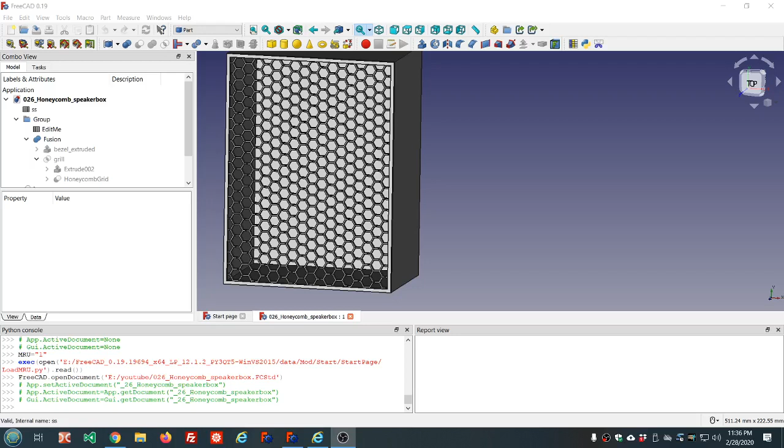In the last video, we made this honeycomb speaker box, but it really wasn't complete because there was no way to latch down this grill. So today we're going to look at some possibilities for making some latches for that.

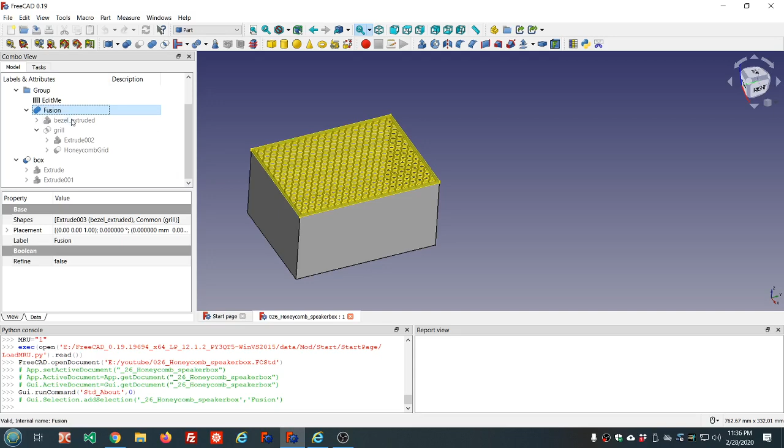So let me just move this a little bit so we can see a little bit more what's going on here. You see, it just sits flat against there.

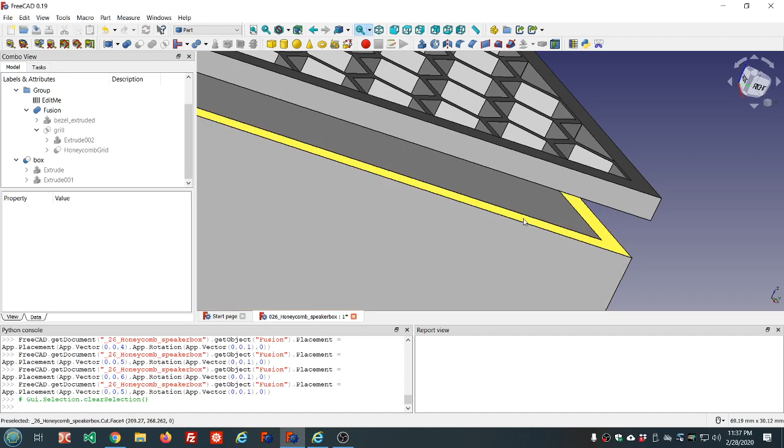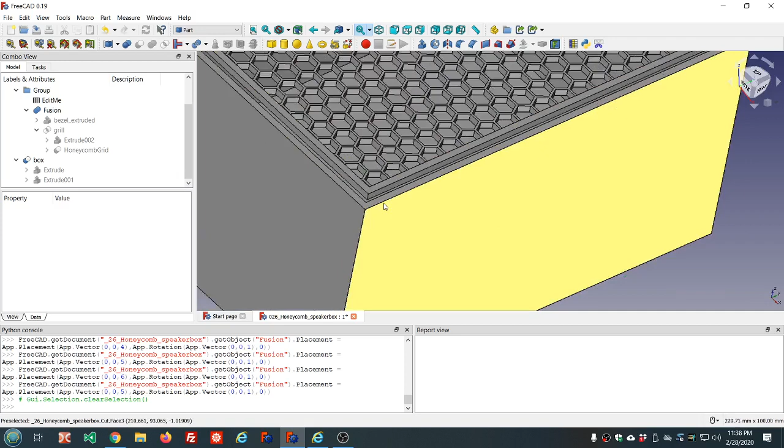Now you could just glue it in, but then how do you get it back off? You could maybe find double stick tape that would probably hold it well enough, and then if you needed to get it apart, you might still take it apart. Maybe a Velcro type thing. So those are some options. We might, depending on the wall thickness you're using, make some little holes, put some little screws. So there's some different options as the model is that could be used.

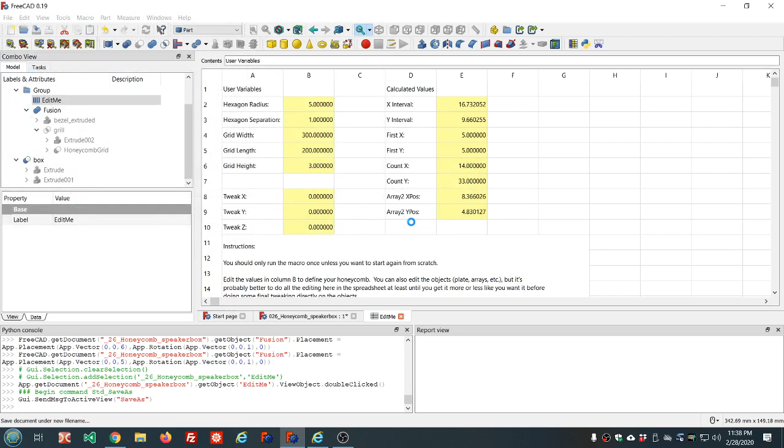But I'm going to try to, the first thing I'm going to do, let's save this as 027, which I already did as I was playing around with this earlier. Okay, so now we have a new file name to work on.

The first thing I'm going to do is change this radius to something much larger. That's going to speed up the process of working on it. It's going to throw things off a little bit, but that's okay. See, the grid is not in the right spot right now, but that's okay. We're not going to worry about that.

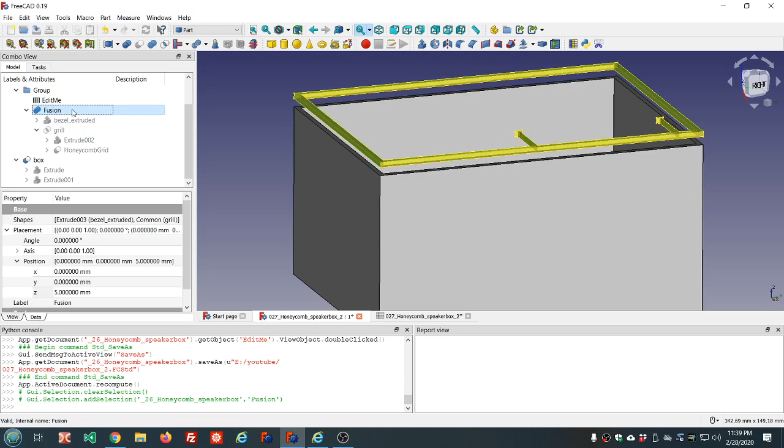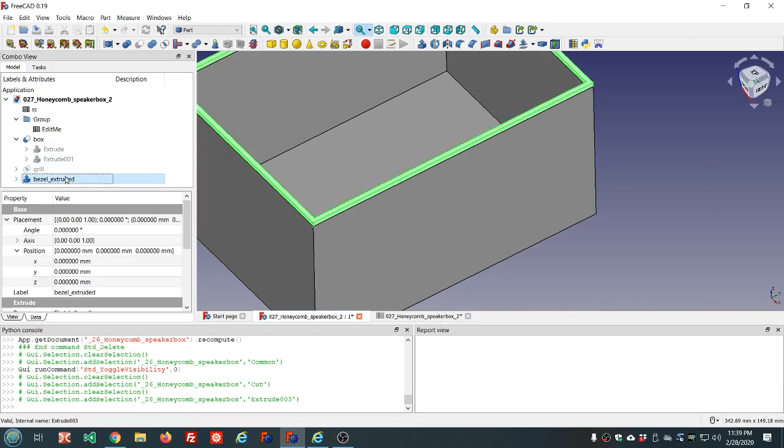I'm going to delete this fusion object, and hide that grill. We don't need to see that. So now we have the box and the bezel. I'm going to hide the box. Let's make the sketch visible. It's the bezel sketch that was used to create the bezel.

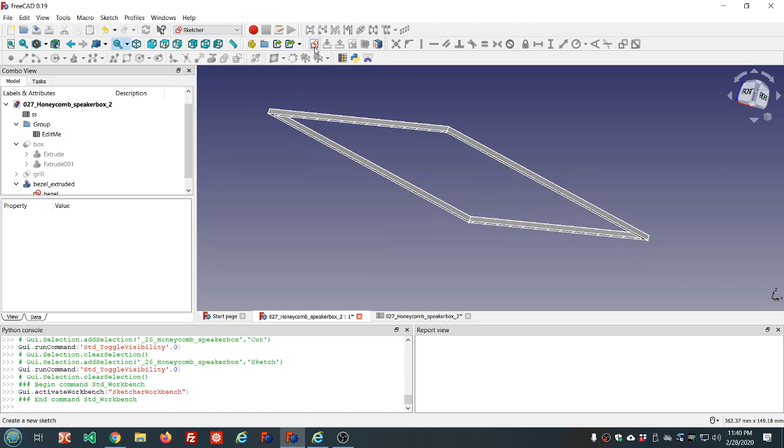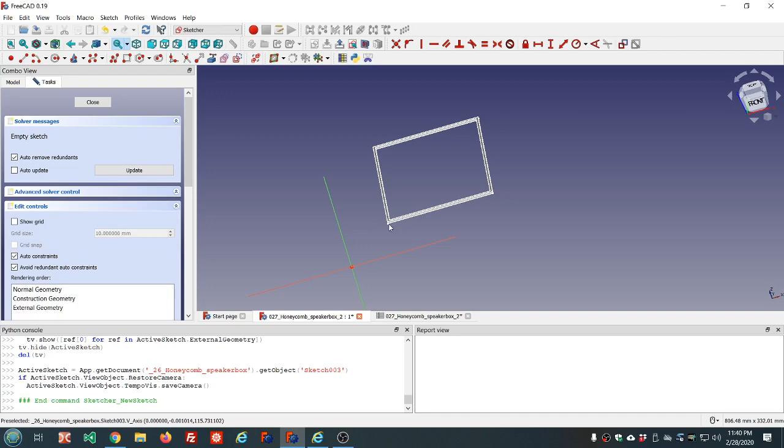Alright, now let's go to Sketcher. Create a sketch on the XZ plane. Now we see that because we didn't center the bezel sketch, we just put it where the honeycomb grid showed up. So we need to move our sketch to that position.

So what I'm going to do is close it for the moment, reopen the bezel sketch. Remember these, we just locked it in place where it was. I'm going to change this to a nice even number like 85. I'm going to give this a name. This is going to be a Y offset.

When you name a constraint, you can refer to it from other objects using the expression engine. So this will be X offset. That little bit of movement shouldn't matter because we had plenty of overlap with the original honeycomb grid object.

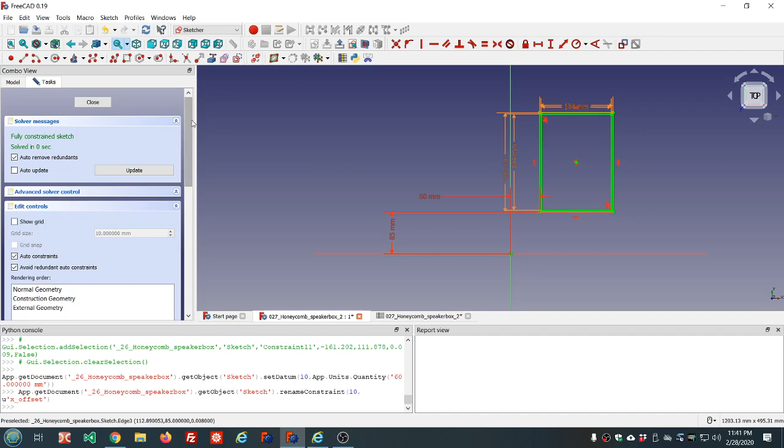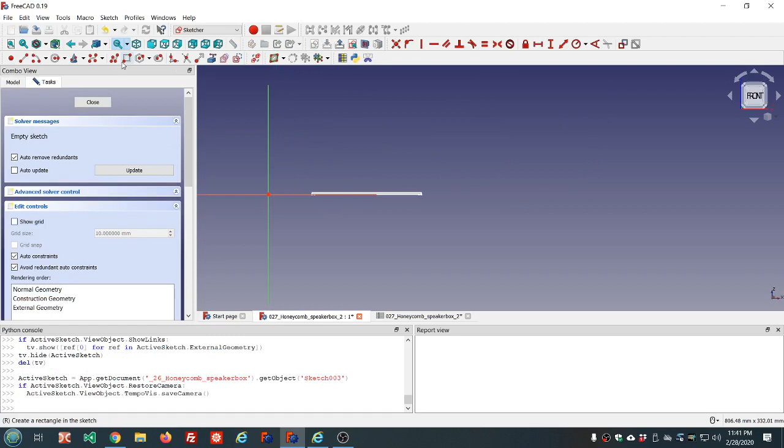Now we'll close that, and now we can move this sketch to position it where we need it. And that's going to be, let me just put something on in the sketch—just a little rectangle temporarily. So now we can see the sketch.

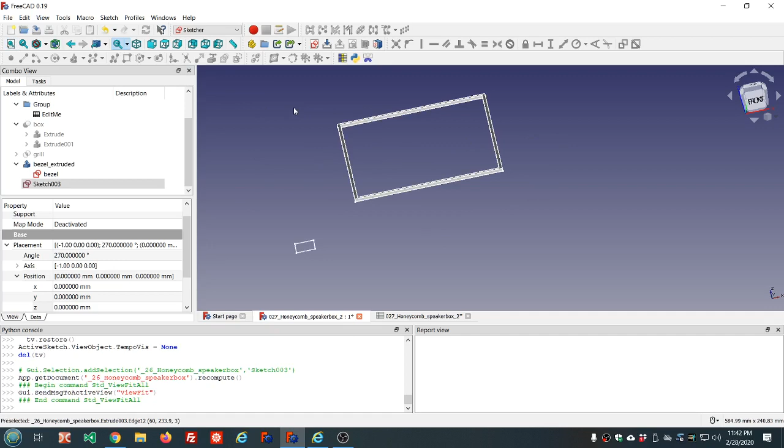Alright, so we want to move this sketch up in the Y direction by the amount of that Y offset, and that's in the bezel sketch. Constraints dot Y offset. And in the X direction, that's the equals key, bezel dot constraints dot X offset.

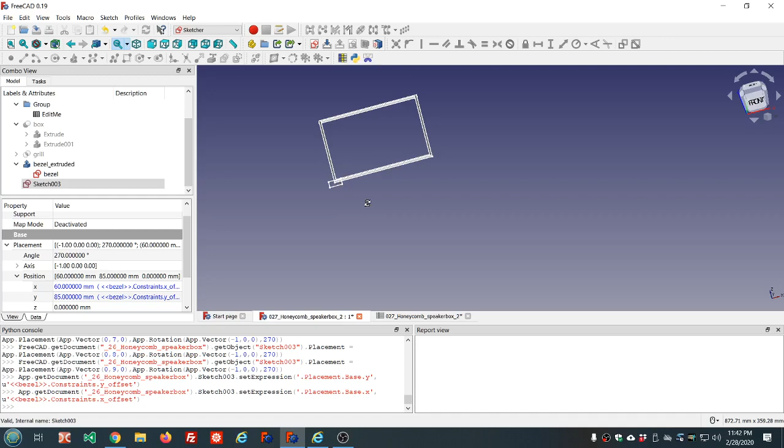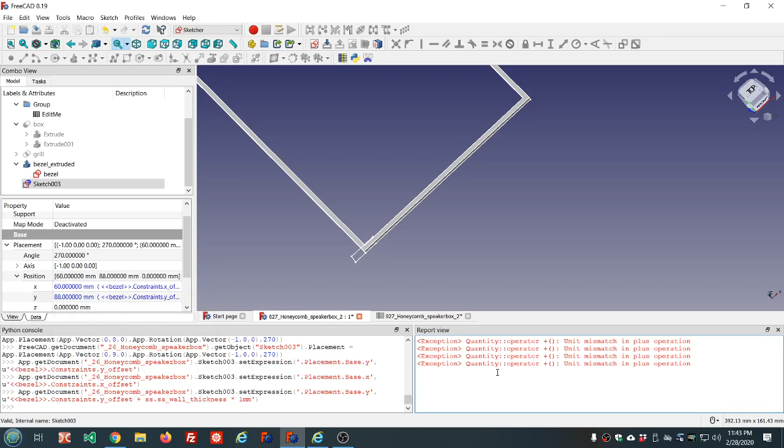Alright, and actually I want to move it up in the Y direction to right here. So that's going to be by the wall thickness. So let's modify this one. Say plus wall thickness times 1 mm. This error is a unit mismatch error. We need to add 1 millimeter to the formula to make that acceptable. And I'll clear this error. So now we see our sketch is positioned where I want it at.

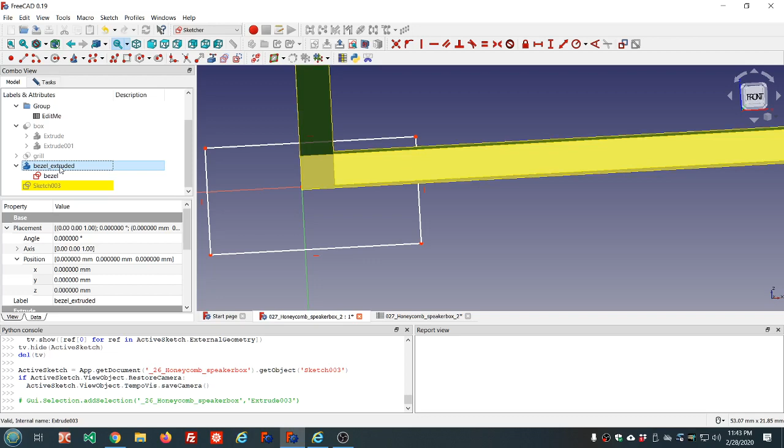Go back into it. Now I want to hide this extruded object. Now I know this is the wall thickness distance.

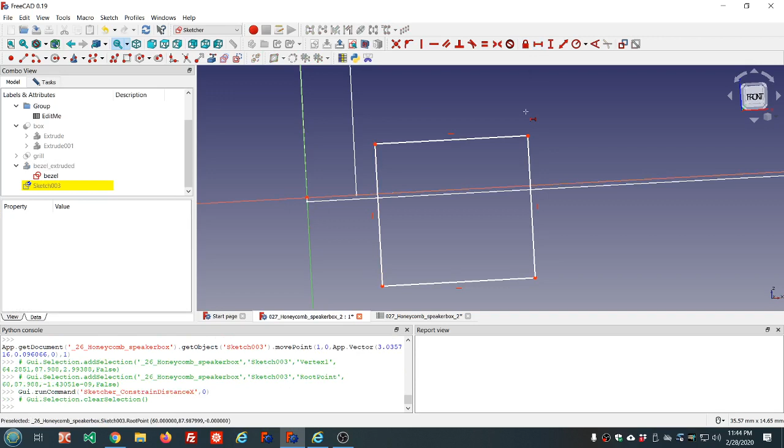So I'm going to set this with a horizontal constraint, from here to here, to wall thickness. Could also create a link to external geometry to that sketch, and that would do the same thing.

Maybe I should do that, but I've done it now, so it doesn't really matter. Now what I want to do is come across this direction by the same amount, wall thickness.

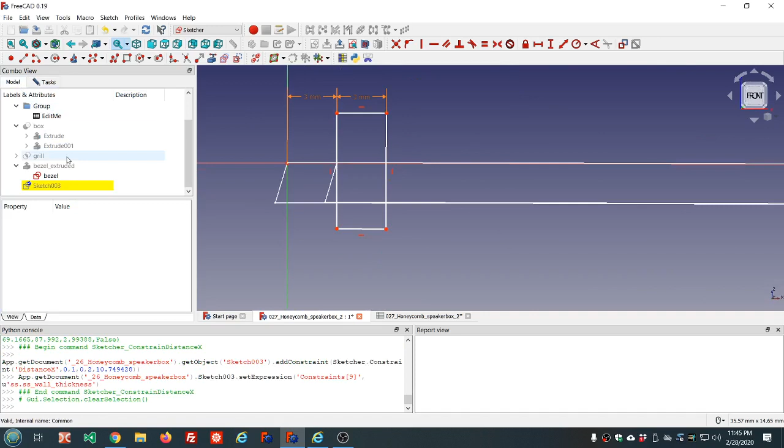Now let me show the bezel again. So see, I'm going to sweep something along this edge, and we're going to extend this bezel inwards by wall thickness, so it'll be twice as thick, the bezel part, in this direction. So that's what's going on here.

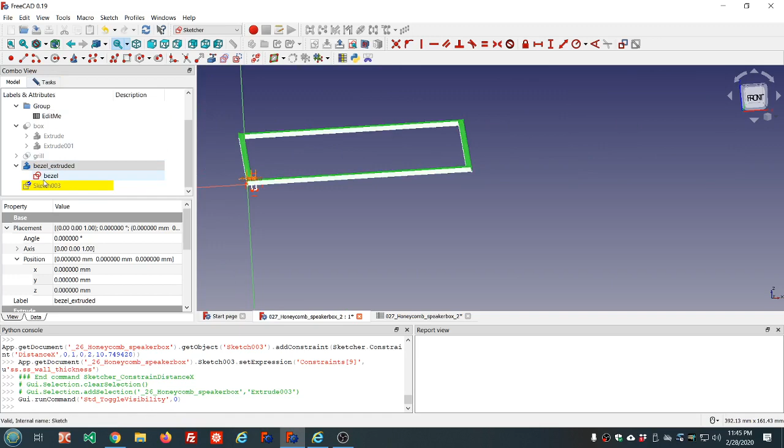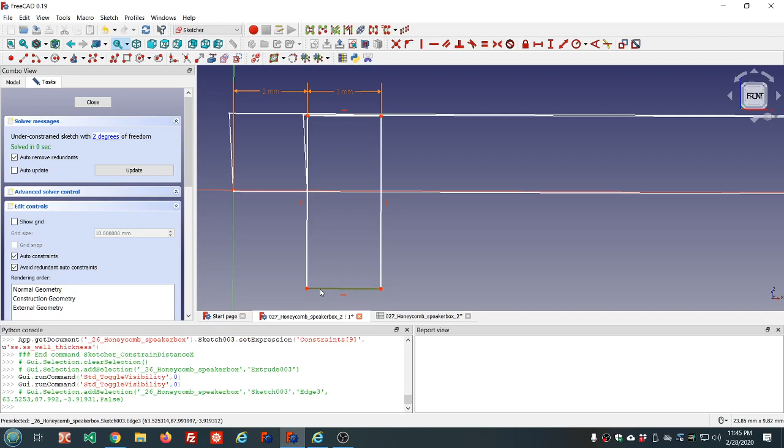But in addition to that, I want to come down below here too. Delete this edge. I'm going to make this wall thickness as well. Equals key here.

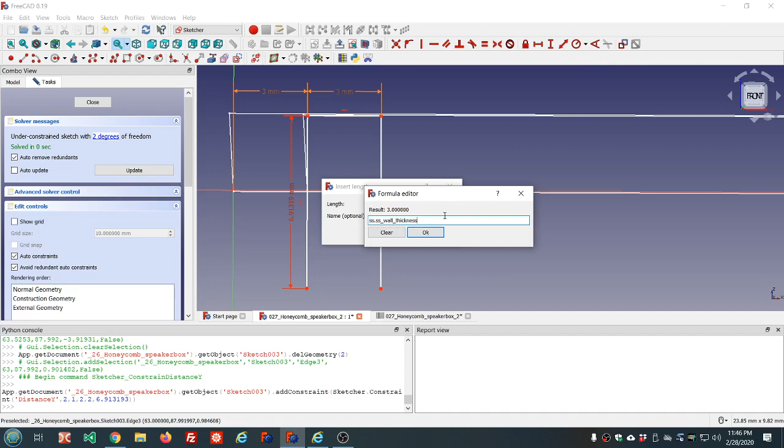And that needs to be wall thickness.

Alright, for this one, yeah, that's good. Now I'm going to add another edge of the line segment horizontal here, and this one will be half of that, wall thickness divided by 2.

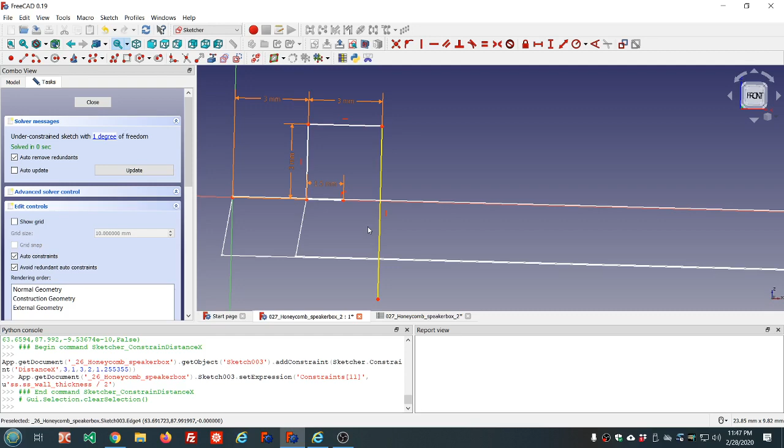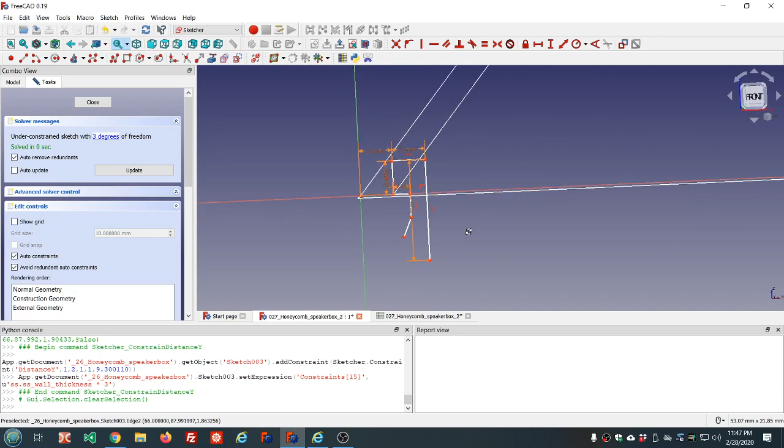Now we come down and add an angle there. So this line, let's make this one wall thickness times 3. And I want this angle here.

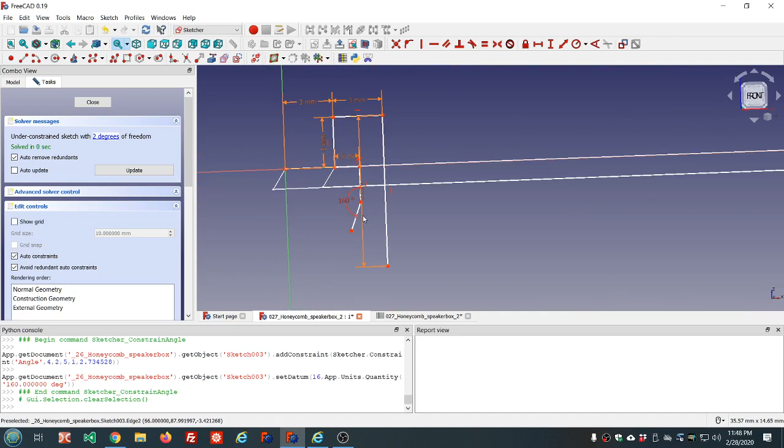160, what does that look like? That way if you print this on a printer, you won't need support because it'll be a shallow enough angle, hopefully.

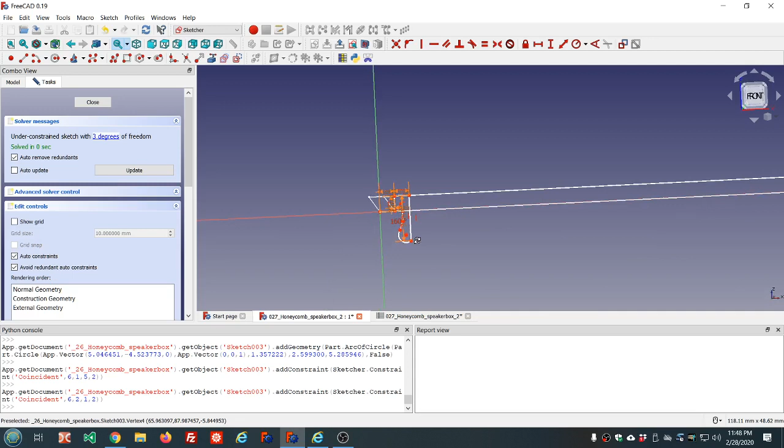And then I'm going to add an arc. We'll catch that point, we'll catch this point. So what I want this to do is come out far enough to push up against this wall, the wall of the box.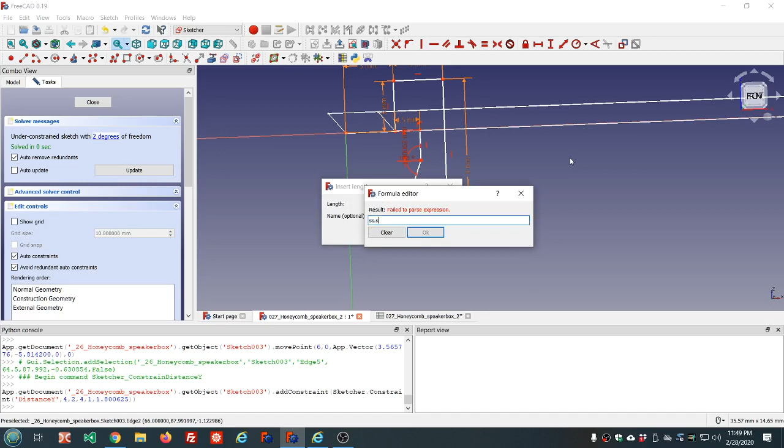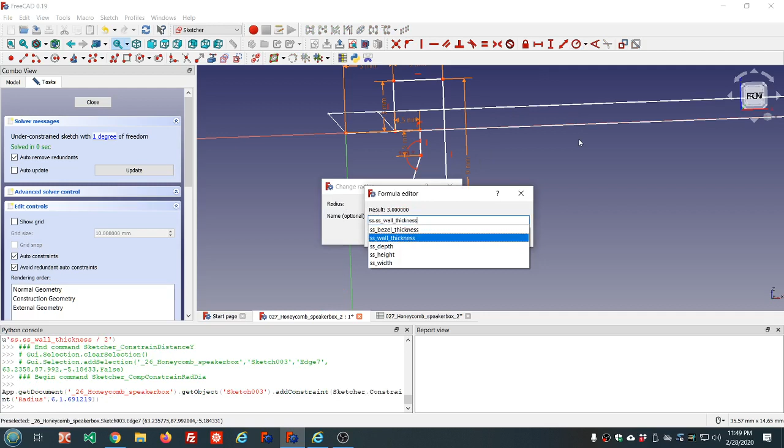And I'll constrain that length. Wall thickness divided by 2, see what that looks like. And this radius, wall thickness divided by 2.

And we have 1 degree of freedom, which is the location of that center. So I'm going to put it constrained symmetrically between those.

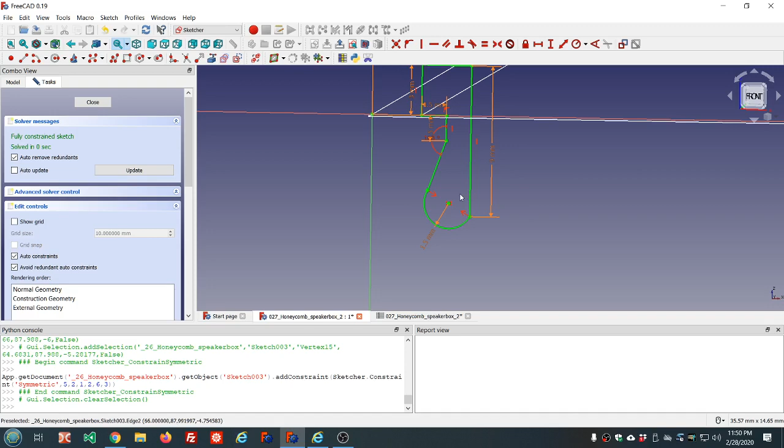Now let's take a look at the box and see exactly how this lines up. We'll go to wireframe mode, view front on.

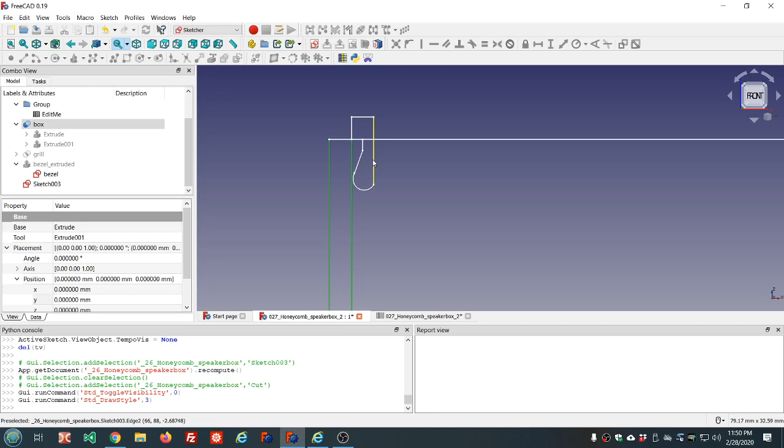Nope, it's not reaching the wall far enough. So I need to make some modifications. I want it actually digging into that wall a little bit, so we'll have a spring action here, pushing against the wall. That's going to hold this lid in with friction. So we need to go back into the sketch.

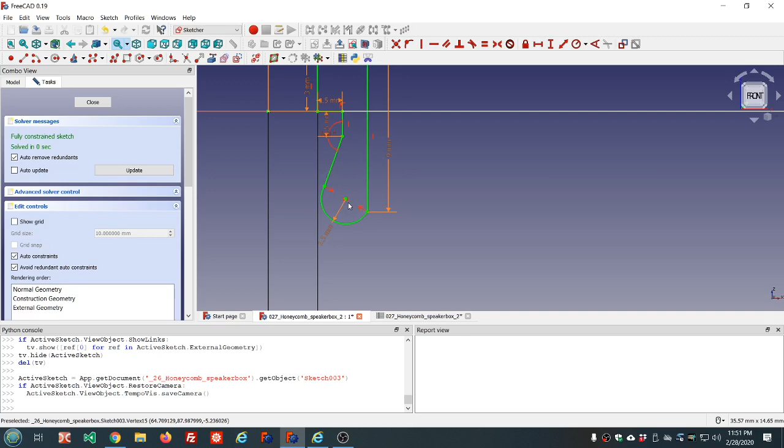Yeah, now we can see what we're doing. Let's get rid of that constraint, and this constraint.

So this one comes even with this. It will intrude a little bit. I think that can work for us. It's not much, but you don't need much. You're going to have to be kind of forcing this in. And we're going to actually cut a little groove in the box too.

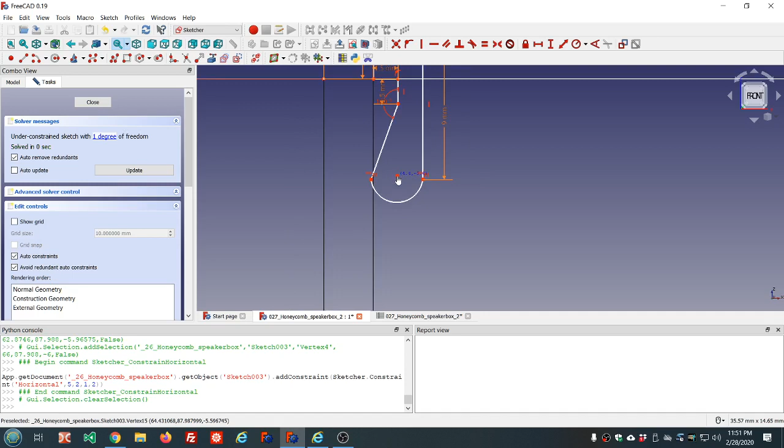So that looks pretty good. I might just constrain these back here, make them all horizontal with each other. Okay.

Now let's go to part. Let's hide the box again. And we'll do our sweep. Let's save this document in case this goes terribly wrong. Let's use the sweep tool.

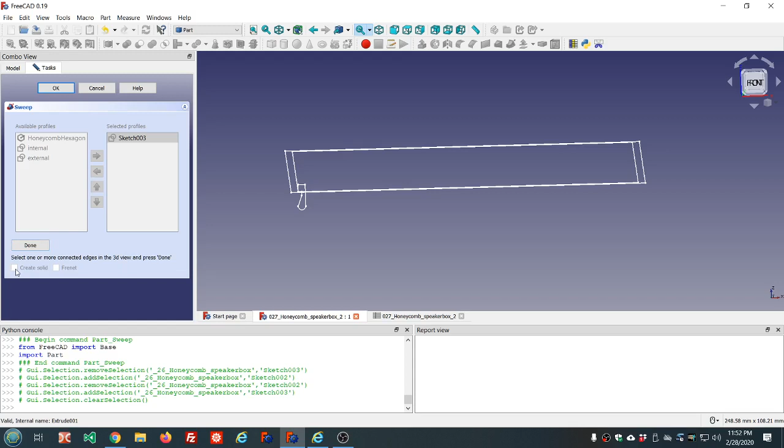It's going to be sketch 3. Sweep path. I'm going to select these inner edges. And we want this to be a solid, and Frenet.

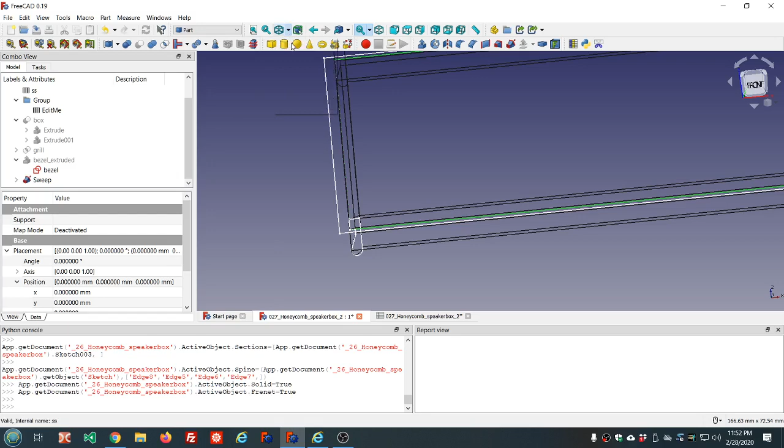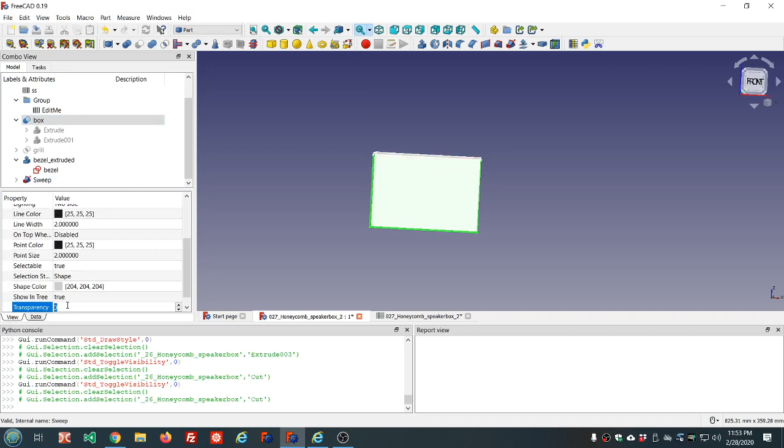If we make the box visible, if we can set the box transparency to something like 25. A little more transparency, 75.

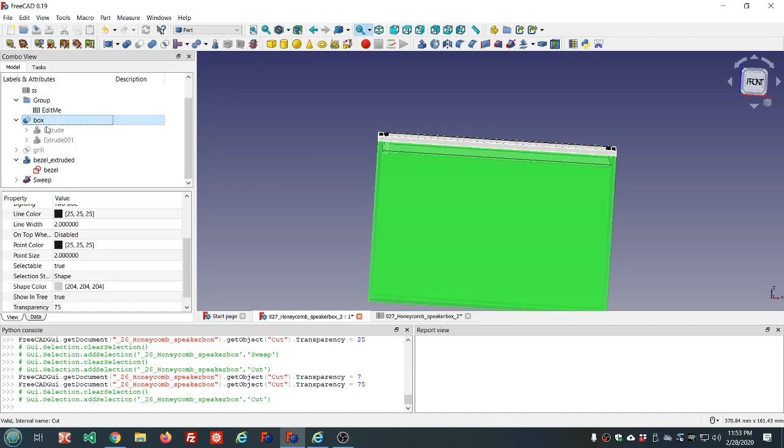Alright, now I'm going to cut the sweep out of the box. And the sweep, the grill, and the bezel will be fused together. That's going to be the lid.

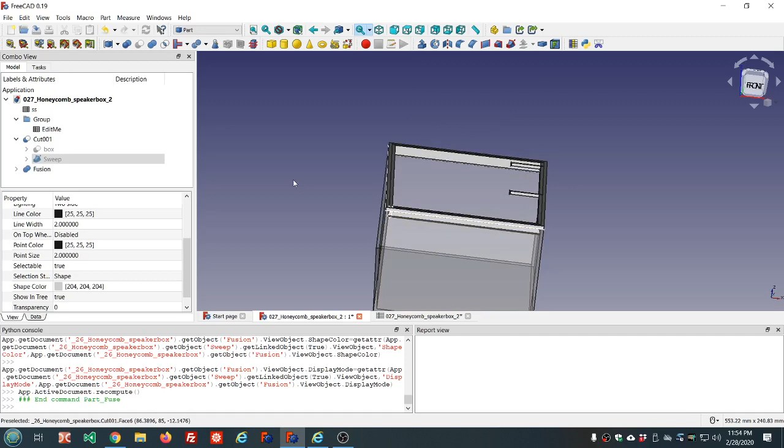Alright, now let's hide that, and hide these two sketches. So this is the inside of the box. Can you see the little groove?

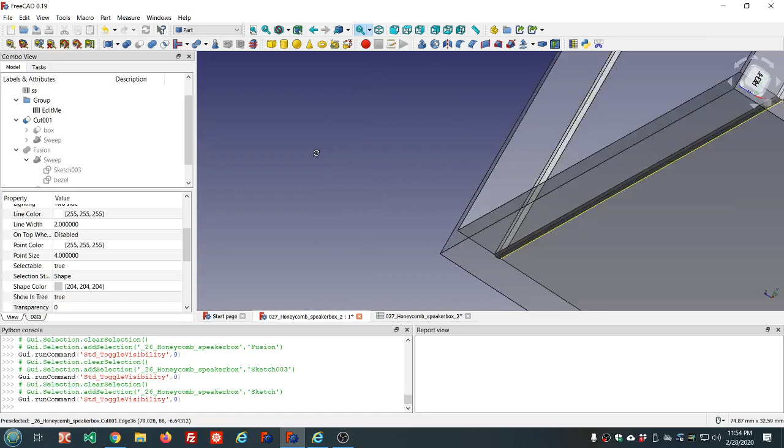I don't know how well that's going to work, but I think it could work. Maybe with a little bit more tweaking, a little trial and error. But I think this could work.

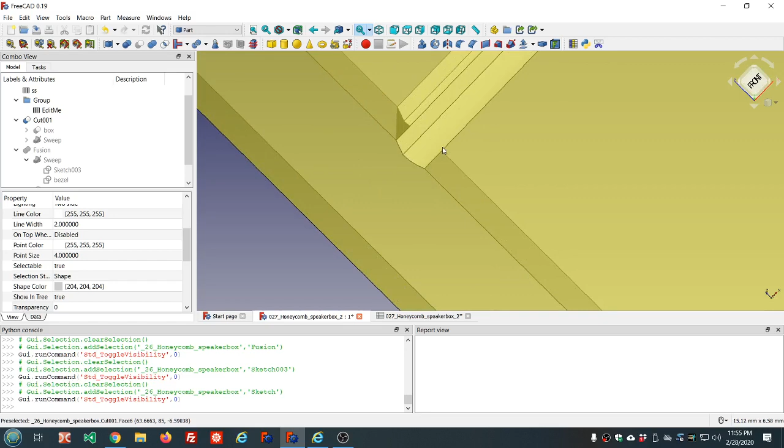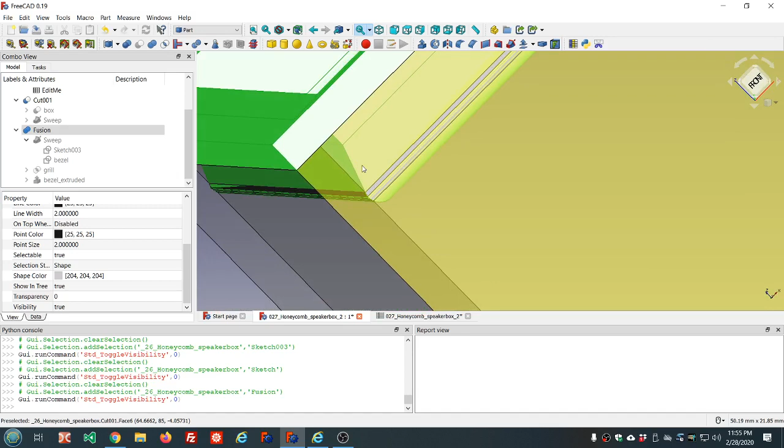Maybe just this angle, bring this up not quite as far. Let me check the geometry on this. Yeah, it's good. Of course the box will be good, that's simple enough.

Okay, now we need to go back in. And this is probably going to take a while to recalculate. We'll set it back to 5.

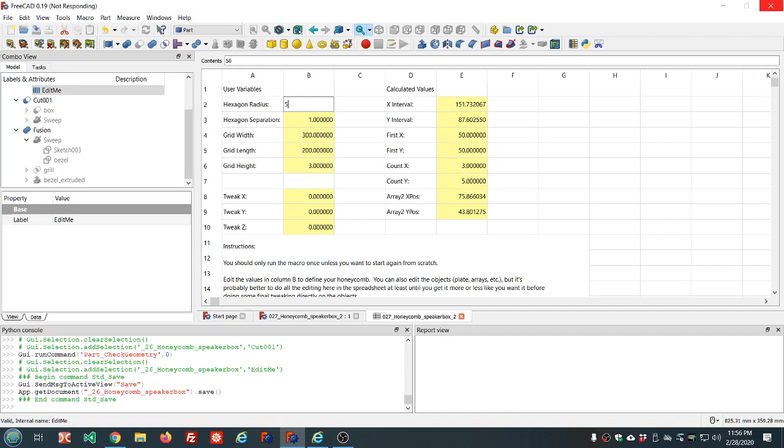I'll pause the video and come back after it finishes. And we're back. Well, that took a while. That took about 13 minutes or so.

Maybe your PC will be faster than mine. It's a little bit older. It's one of the original Core i7 processors.

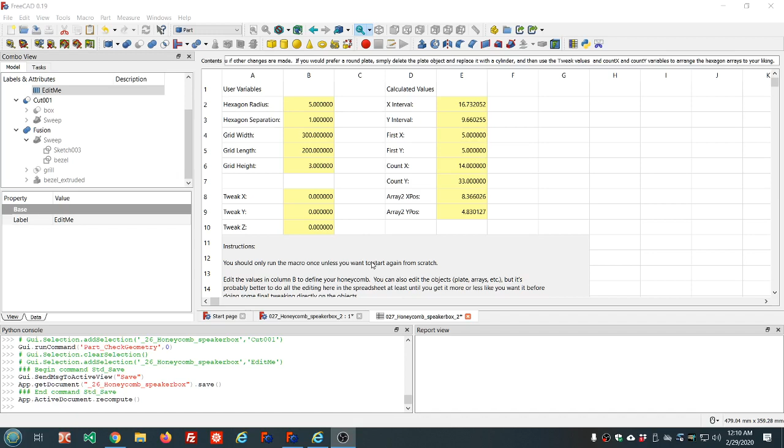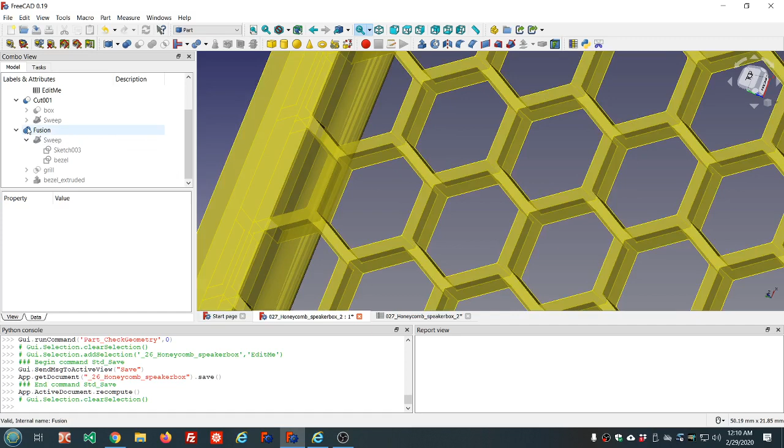Now notice this little extra bit here is what part of what was swept, and because I have the refine set to false, that shows up. But I'm going to put it on true, and hopefully it won't take too long to do this. And that's just going to remove these extraneous extra edges in here.

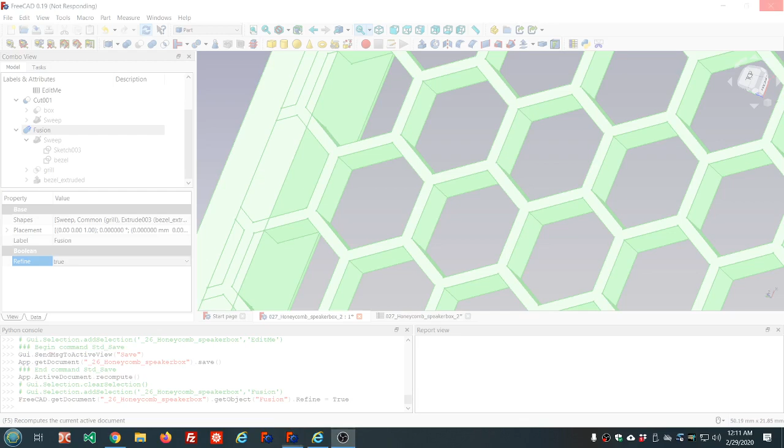I'll pause it again while this is working. And we're back, and that took about 8 minutes or so. So you have to be patient with FreeCAD.

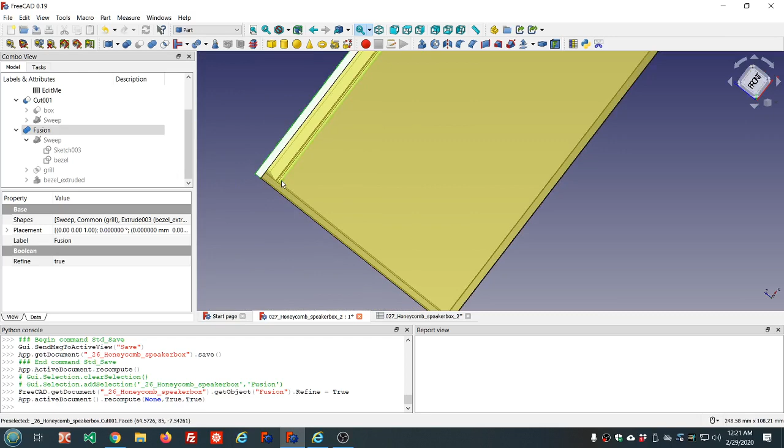Sometimes it takes a while to do things, and it looks like it locked up, but in reality, if you're just patient, it'll come through. And this has a lot of stuff it has to do in this particular case. You see there's a lot of stuff going on.

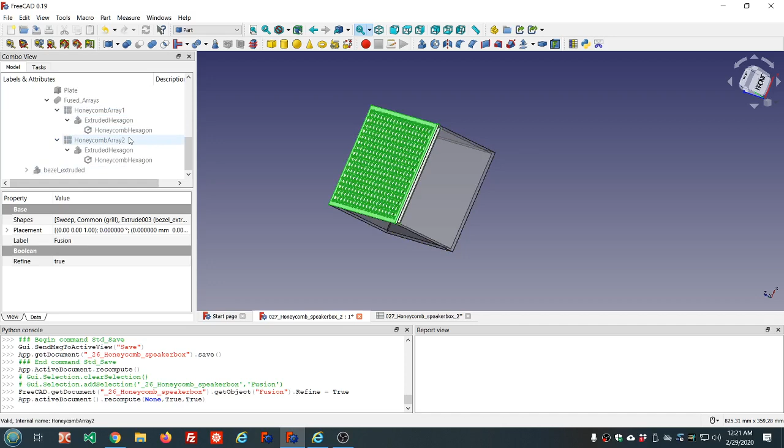These two arrays have to be fused, and then we have a union and cuts. Just all kinds of multiple operations, and the more items in your arrays, the longer it's going to take. Plus, this grid actually extends beyond what's being shown here.

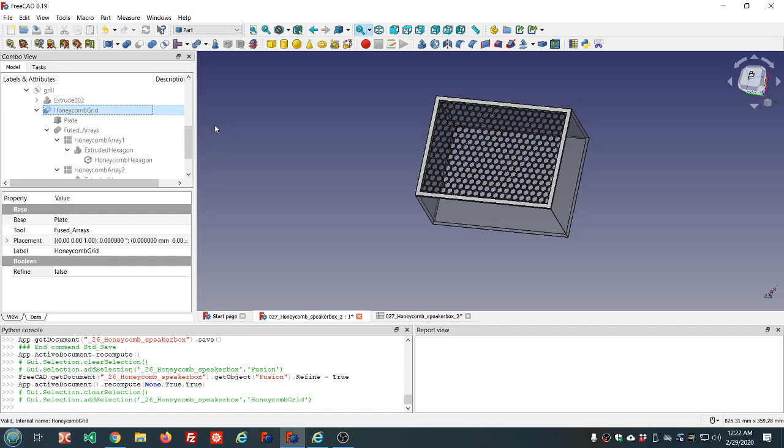So I could have reduced this size to better match what was actually needed and speeded things up.

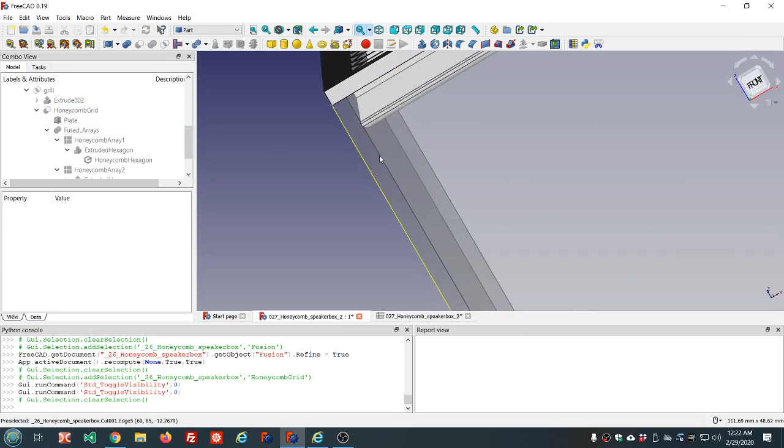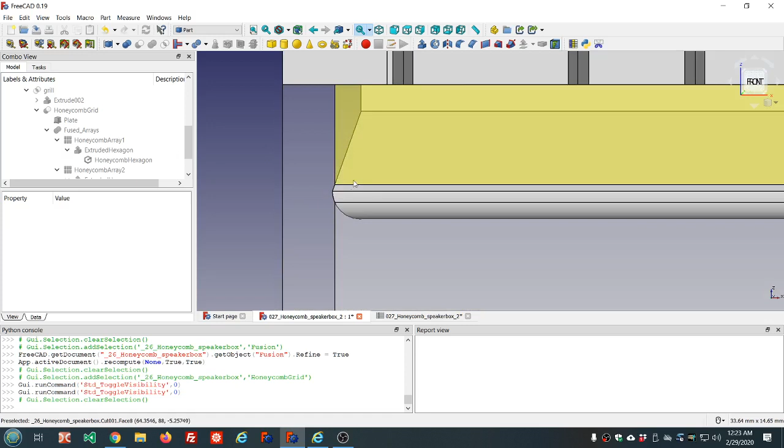I don't know how well this latch mechanism is going to work, if at all, but I think it will. You see, you have a smaller part here that's going to be able to fit into the box to get started. And if you made it of plastic, it should work - if it's some other manufacturing process, it won't work. But with plastic, it should be flexible enough to kind of spring inward as it comes down. This part.

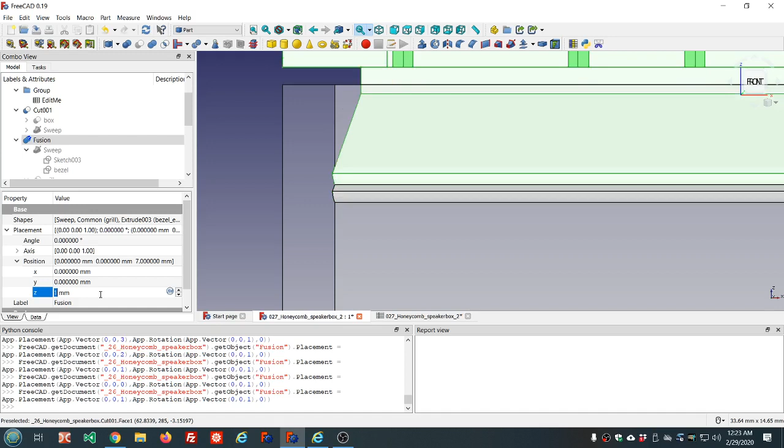So as you push it in, you see it has a little bit of room to get started. And now you have to kind of force it in, and hopefully it'll be able to spring in until you get down here where it'll lock into place. But like I said, you might need a little trial and error.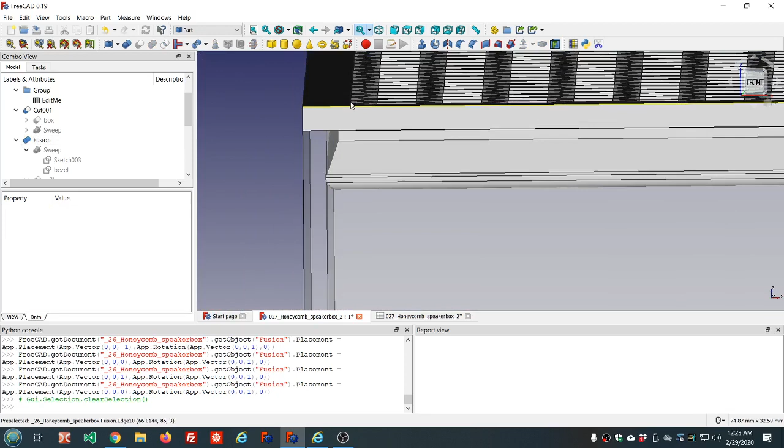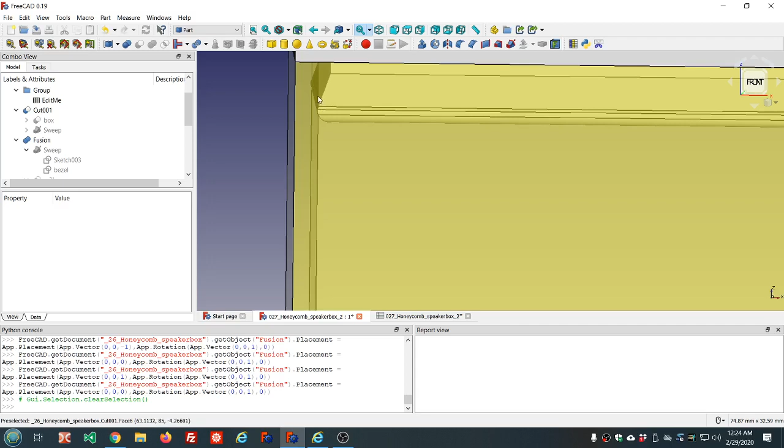Another alternative: instead of cutting into this wall, you can make a little ring around the wall, a little lip here, and adjust this accordingly. Maybe just come straight down and across. So that's another option.

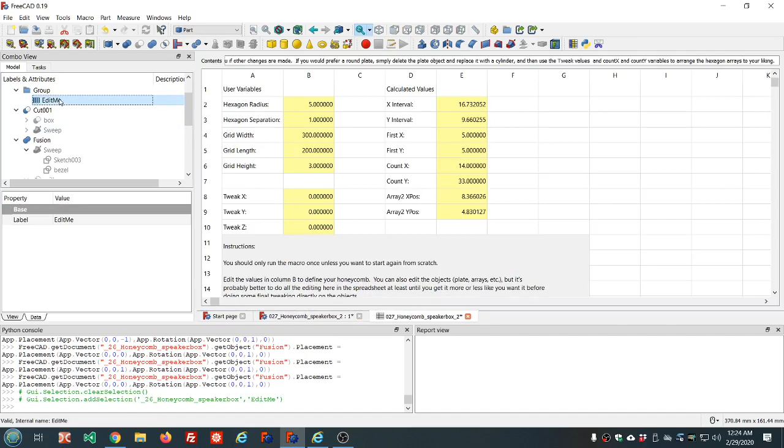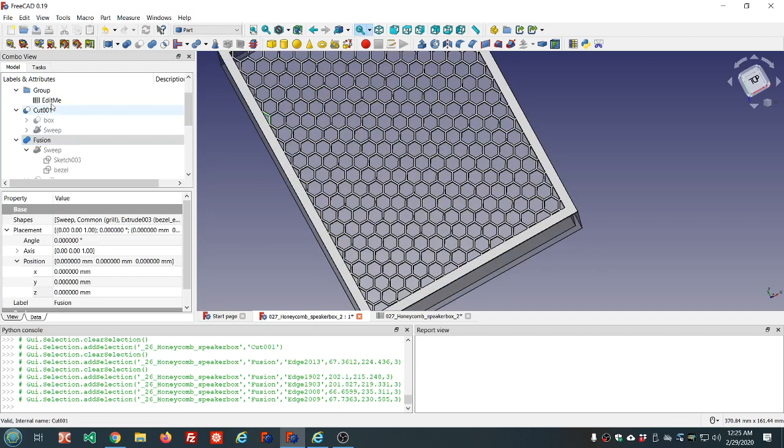I would show you the tweaking setting in here, but it takes so long, I'm not gonna do it. Basically, these are pretty symmetrical from this part over to this part. It's fairly well in the middle, so it's pretty well centered. But with the tweaking, with this tweak X and tweak Y, you could adjust that.

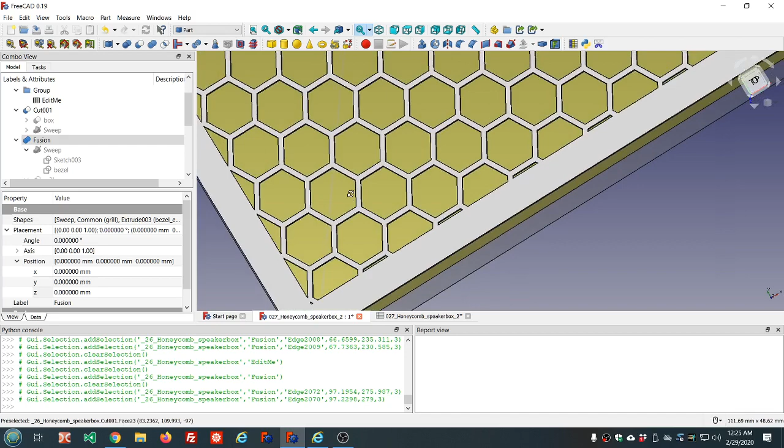So your entire grid would stay where it's at, but you could move this edge closer to this edge, and it would all shift up if you wanted to. If you don't like having just a little partial bit here, you could shift it all over and get it lined up a little more evenly. So that's what that's for.

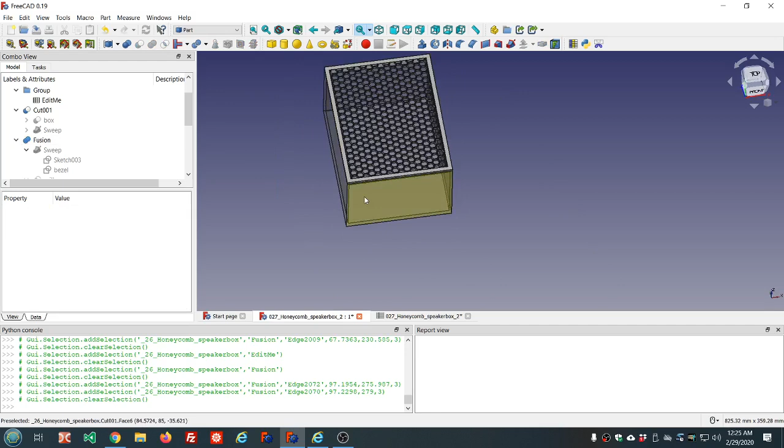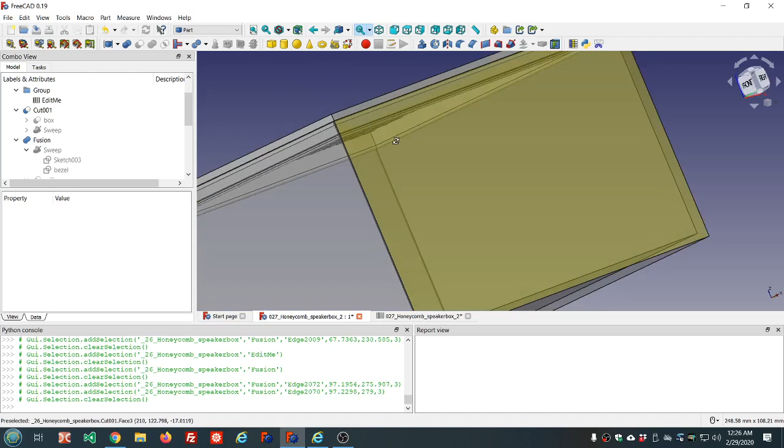And of course, depending on the geometry of your speaker, you'll need some way of mounting it in there. So I would envision having some extra structure in here to screw the speaker into, or whatever, however you're going to mount it. This should not interfere, but it might, depending on where you put in the speaker. So hopefully not.

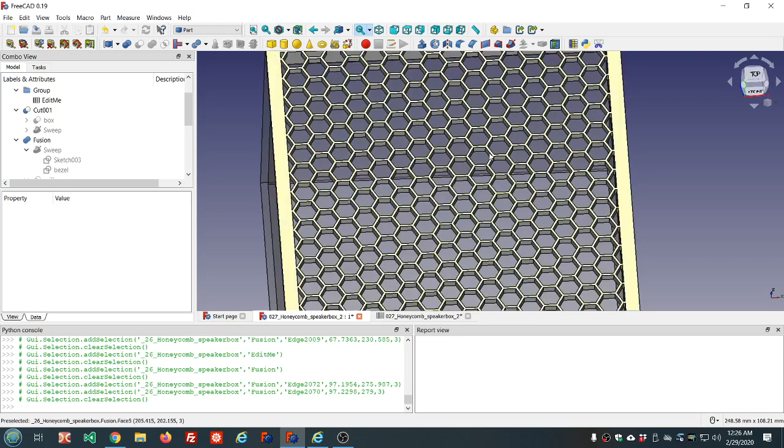Of course, this is really not intended as a video on making a speaker box. It's a video about using this Honeycomb Maker macro more than anything else, and these two videos anyway. You might want to use a different radius, different thickness. But it's fairly parametric. For some reason, when I change the radius, the entire object shifts. I'm not sure what's causing that.

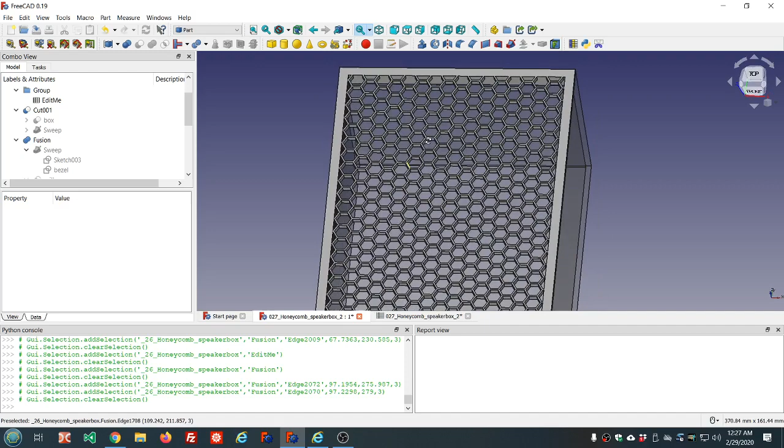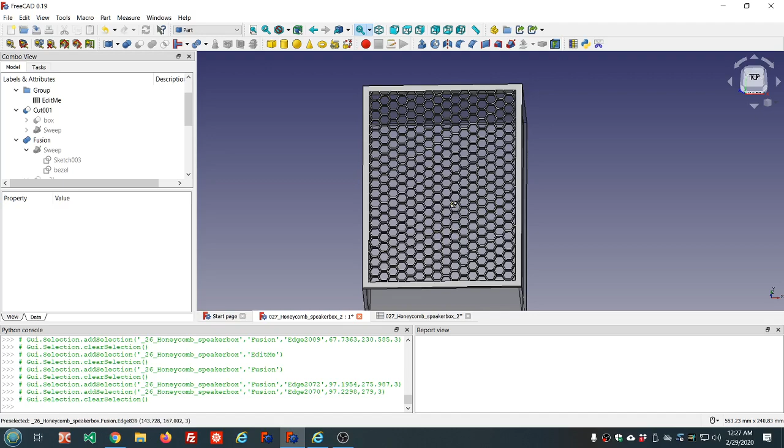But aside from that, it works pretty well. So that's it, gonna be it for today. I'm going to wrap it up. Thank you for watching as always. Hopefully you're enjoying the series, hopefully you're learning a few things, and hopefully you're exploring on your own and better than I am at FreeCAD by this point. Because I'm not, like I said, I'm not a great expert. I just know enough to get myself in trouble, really. But I'm learning, almost every day I learn new things about this software. It's such a big project.

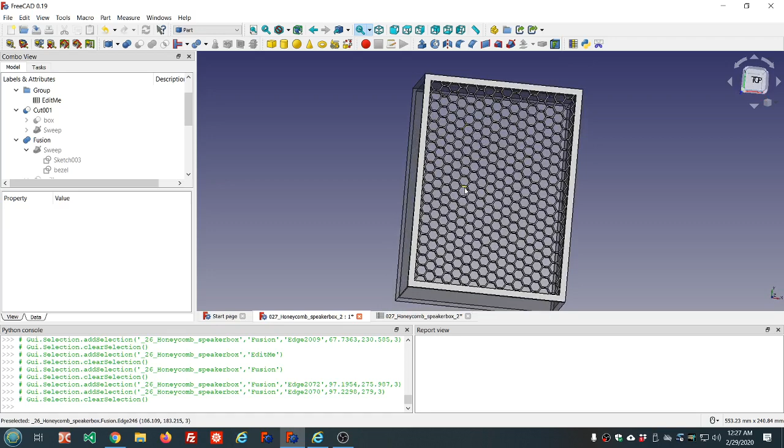There's so many different places in it. I'm going to try to learn that assembler and make some videos on that once I get it figured out. The Assembly 4 that I talked about in an earlier video, you go to add-on manager. I was thinking this was the assembler that Real Thunder was working on, but it's not - his is Assembly 3.

Anyway, it is available bundled in FreeCAD with the app image files. If you download one of the newest app image files from the development section on the website, from the releases section in the downloads area on GitHub, if you get the app image file, you need Linux to be able to run it, but it will have the Assembly 3 workbench installed in it. I think there are some dependencies is the problem, and hopefully that's something that's going to get added before too long.